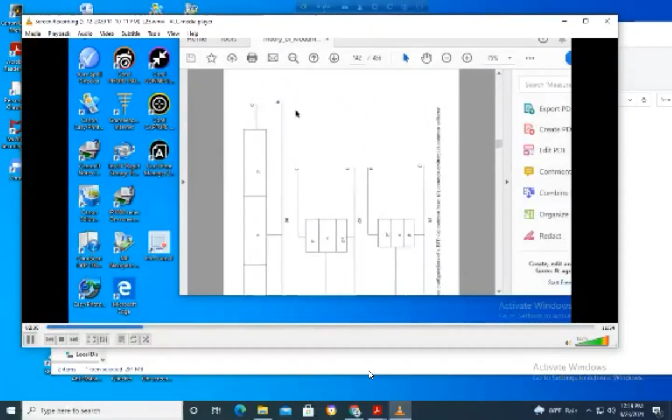So if this is a picture of A, it is common base structure. This is common base, means this is the base structure, this is emitter, this is base terminal, and here is another terminal, the collector, and it is also collector base junction. So it has two junctions. You know, two PN junctions are cascaded, and common emitter connection is like this. Base, you get input, here is the emitter, so input gets from emitter and base, output from collector and emitter.

And in case of common collector configuration, input is from base and collector, output is from emitter collector. And in all the cases you have two junctions cascaded. Here, in this case, it is PN junction and NP junction, and this case is also the same. Sometimes it is called P plus to indicate that it is a highly doped junction.

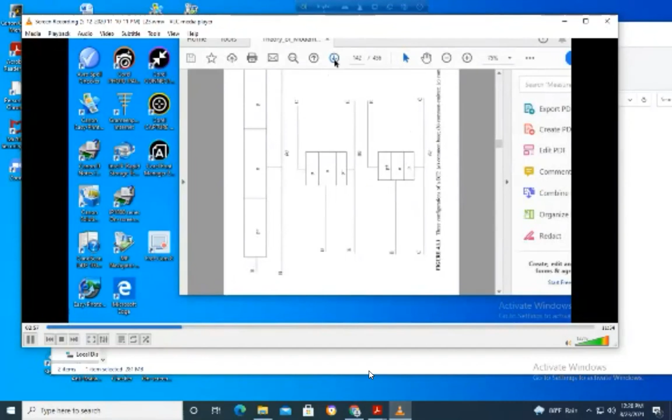So we go to the next page, page 132 of Brennan. So we must admit that the reference for this study is the book of Brennan, and we are on page number 132 now. A BJT can be biased into one of four possible modes. You know these things from first year, second year. It's saturation mode, active mode, inverted mode, and cutoff mode.

In the saturation mode, both emitter base and collector base junctions are forward biased. So this means both of them are forward biased in the saturation mode. The active mode consists of a forward biased emitter base junction and reverse biased collector base junction. An inverted mode has the emitter base junction reverse biased. The active mode is used for amplification.

Under active mode biasing, the output collector current IC is approximately equal to the input emitter current IE. However, a small portion of the emitter current is not collected at the output. The base current consists of three components: recombination current, injection current, and the reverse biased junction sweeping electrons current. Recombination, why does it occur? Of injected holes from the emitter with electrons stored in the base.

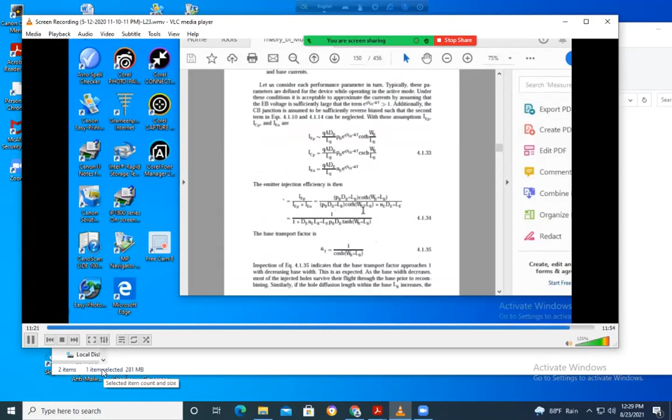So that is the end of this review, but our target was to study heterojunction BJT. So in that case, what is the motivation to study these topics? That is the important factor, and we will deal with it in the next lecture.

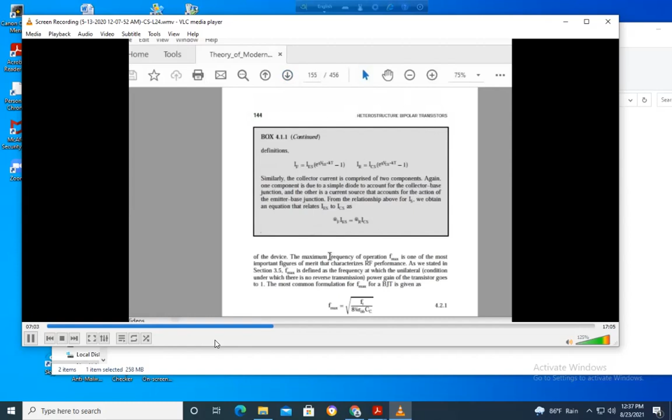Then we go to the next important piece, frequency. Next it asks us to see page 144, where there is a very important frequency equation. Here, maximum frequency of operation is one of the most important figures of merit that characterizes radio frequency performance, when you use these devices in the communication field with high frequency signals.

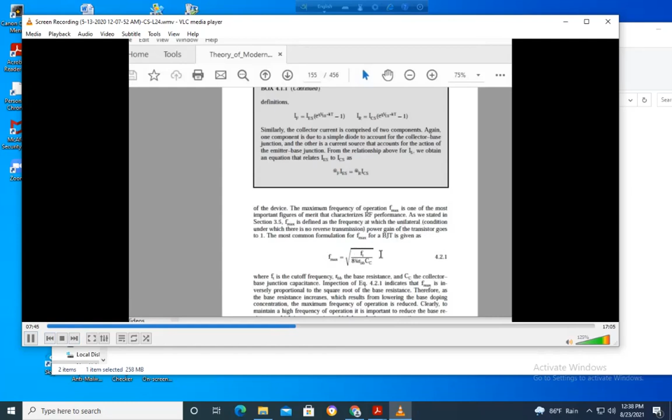We need high frequency, good performance. But in the case of BJT, F max is defined as the frequency at which, under the unilateral condition with no reverse transmission, the power gain of the transistor goes to 1. The most common formulation is F max equal to this one, where Ft is the cutoff frequency and RBB is the base resistance. So if we change the doping concentration, this base resistance will adversely affect the frequency performance. The text on the previous page is explained here with an equation.

Therefore, as the base resistance increases, resulting from lowering the base doping concentration, the maximum frequency of operation is reduced. Now in the next page, go for the solution. This part is the solution, and the solution is HBT, heterojunction bipolar transistor. And what will happen in this HBT? We'll insert a wide band gap semiconductor material for the emitter. This wide band gap semiconductor enables the use of a higher base doping concentration without compromising the DC common emitter current gain.

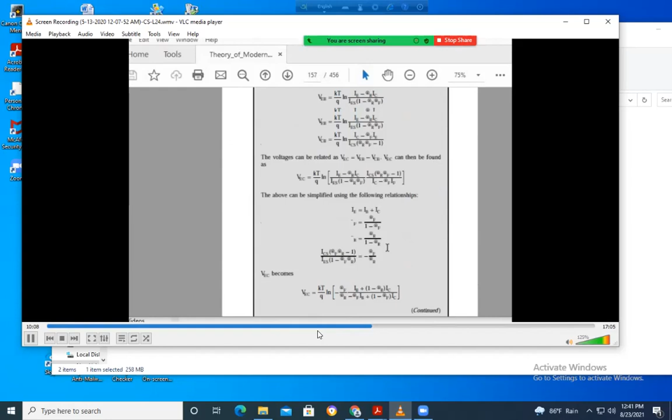The device type is NPN, implying that the emitter is doped N type, the base is P type, and the collector is N type. The collector is N type. So if we go to page number 145, this is not the relevant page. If we go to the energy band diagram, this is the energy band diagram of HBT.

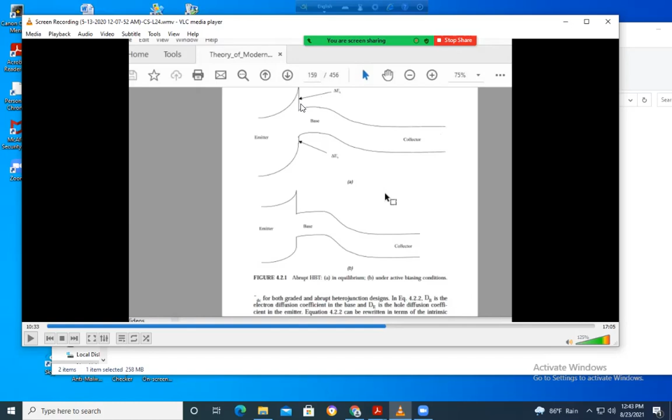This energy band diagram is important. The left side is the emitter, the base is P type, and then the collector is N type. And as this is a heterojunction, you see that the energy band diagram will have a discontinuity in this case here, because the heterojunction is structured here, not here. So here it is continuous, but in this part there is the abrupt change of the conduction band. So this change is called band offset, conduction band offset.

On the bottom side, this is the valence band. This del EV is called the valence band offset. And if we go to the equilibrium case, this is the energy band. If we go for the under bias condition, then this gap may be reduced. This part may be flattened. This is curved; here it is flattened. So this type of change will occur in heterojunction bipolar transistors. So this page 148 figure is very important to understand the energy band diagram.

And now if we go back to page number 147, the structure is NPN, so the collector is N type, the base is P type, and the emitter is N type. NPN transistor is used here instead of PNP, since NPN HBTs are far more commonly employed. So it is more popular. This is due to the fact that the NPN HBT offers far superior frequency performance than PNP devices due to the much higher velocity of electrons.

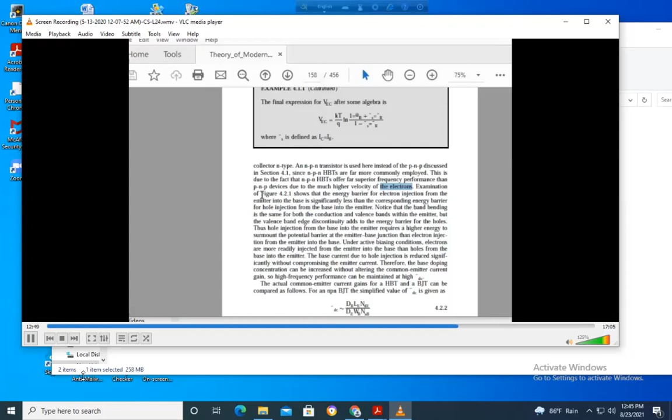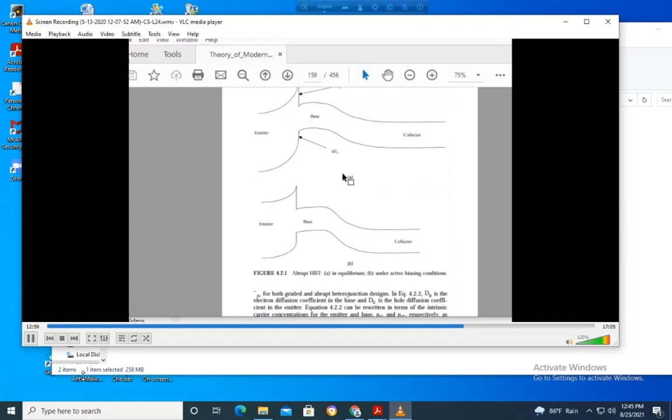So you will observe figure 4.2.1. We are now on the page with 4.2.1, the barrier here. In contrast with the abrupt HBT equation, we are going to page 148. Figure 4.2.1: the energy barrier for electron injection from the emitter into the base is significantly less than the corresponding energy barrier for hole injection from the base. You see, the barrier is higher. Okay.

Energy barrier for electron injection from the emitter into the base is significantly less than the corresponding energy barrier for hole injection from the base into the emitter. Notice that the band bending is the same for both the conduction and valence band within the emitter, but the valence band discontinuity adds to the energy barrier for the holes. So for hole injection, the barrier includes ΔEV, so it is higher. So that is the problem here.

So examination of the figure shows that the energy barrier for electron injection from the emitter into the base is significantly less than the corresponding energy barrier for hole injection. And the reason is band bending is the same for both conduction and valence bands within the emitter, but the valence band edge discontinuity adds to the energy barrier for the hole. Thus, hole injection from the base into the emitter requires a higher energy to surmount the potential barrier.

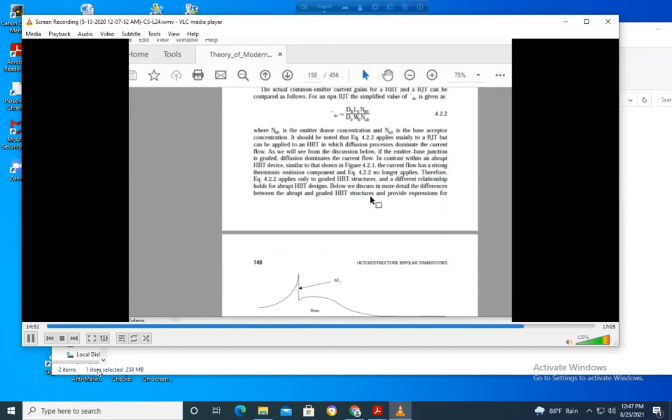So for the hole, it will face a high barrier, but the electron will face a low barrier. So under active biasing conditions, electrons are more readily injected from the emitter into the base than holes from the base into the emitter. The bottom figure clearly shows this barrier.

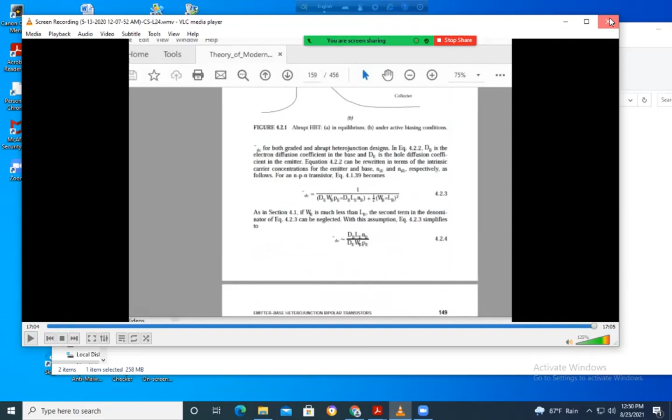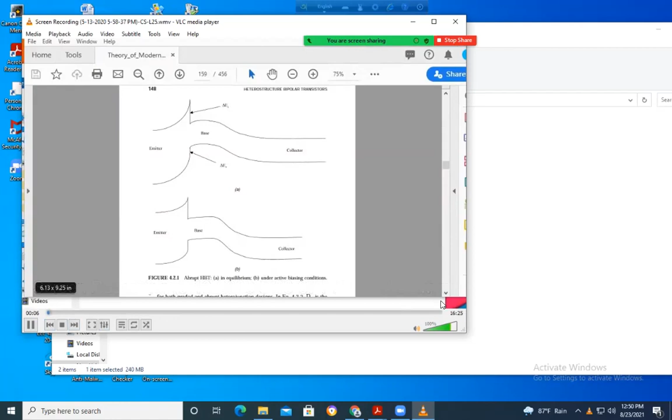Welcome to lecture 25. Last lecture we were dealing with common emitter heterostructure bipolar transistors, HBT, and this energy band diagram is related to that device. This is the emitter side, base side, collector side. This is the conduction band, this is the valence band. As the heterojunction is created here between emitter and base, there is a discontinuity in both ΔEC and ΔEV. That's called band offset.

This figure is at equilibrium, but when we go to the biased condition, the middle portion, the base portion, becomes a little bit flattened. The gap here is somewhat changed, one way in the conduction band and another way in the valence band. And this equation is mentioned, the equation of the relation between two currents.

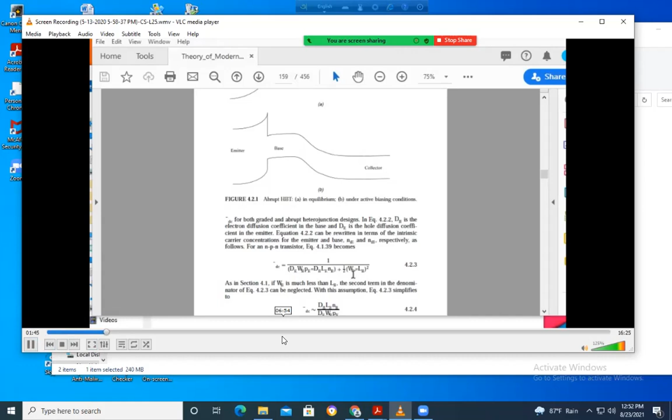One of them is base width WB, base length, diffusion coefficient D, DB, etc. And if WB is much less than LB, which is in the second term of the denominator,

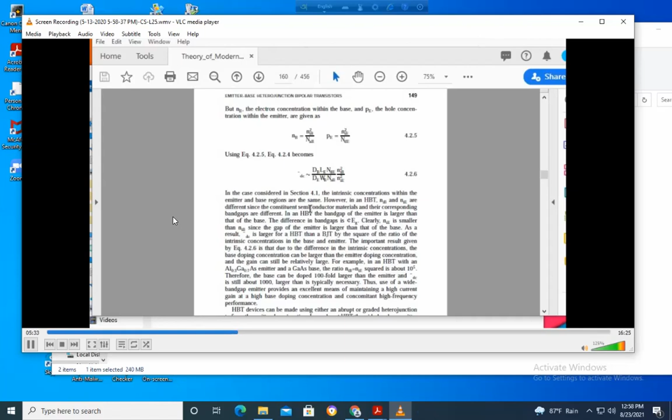You know, intrinsic carrier concentration of silicon is different from intrinsic concentration of germanium. So when you prepare a heterojunction, there are two types of material. So intrinsic carrier concentration will be different for them, and corresponding band gaps will be different. Because in an HBT, the band gap of the emitter is larger than that of the base. The difference in band gaps is del Eg. Clearly, NiE is smaller than NiB, so the gap of the emitter is larger.